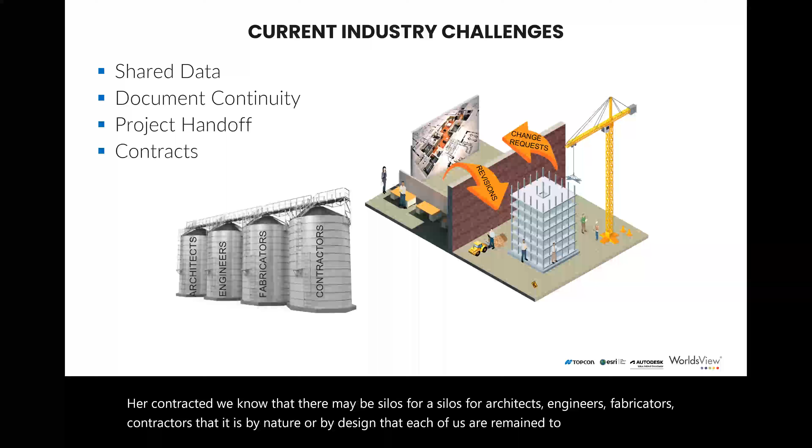In terms of industry challenges, I believe one of the key challenges we face as construction professionals is what we call working in silos. From the traditional approach to project delivery, or generally how most projects are contracted, there may be silos for architects, engineers, fabricators, contractors, that by nature or by design each of us are meant to work separately. But that in itself brings a lot of problems, especially in terms of project delivery, meaning there will be no proper coordination and collaboration, issue management, and sometimes the aspect of constructability doesn't usually come in very well, since each team works independently or separately.

And then once the design is completed, that's when you try to merge them into one at the end, by submitting construction documents that are sent to the contractor to work with.

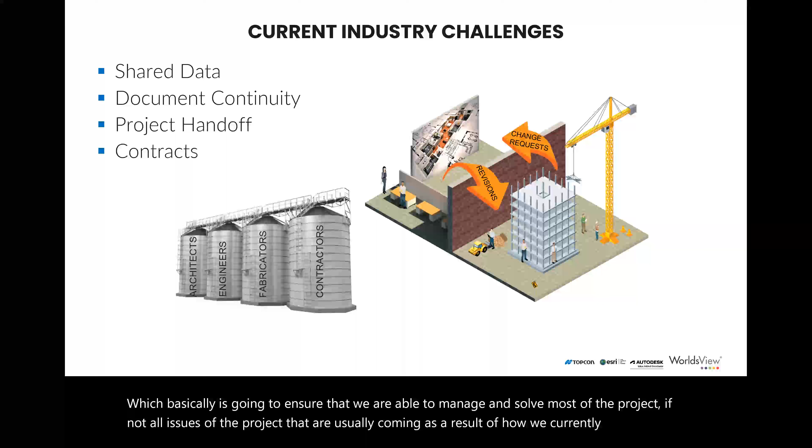So it brings us a lot of challenges, especially in terms of document continuity, project handoffs, and contract management also becomes very, very difficult. I'm not saying we need to completely move away from design and build as a method of project delivery. We can still work with that contract method, but there are better ways that can enhance collaboration and coordination, which will help us manage and solve most, if not all, of the project issues that usually come as a result of how we currently work, like managing change requests, revisions, and related aspects.

Also there's the aspect of distributed teams. Design and build teams are most of the time distributed, unless you are a multidiscipline company, and even then you still want to work with external consultants who may be located within the same country, or in different countries, or a client could be in a different location, then consultants and contractors coming in from different regions. That in itself brings a lot of issues in terms of the team being distributed.

So how can we ensure that we manage our project, especially from a communication aspect, sharing of data and information, before we even get to collaboration and coordination, which requires even better tools to help you manage the project properly.

So there are various trends that every single time I get a chance to present or talk to people, I like putting across. If you are working within the AEC space or the larger construction industry, whether an engineer, an architect, an owner or operator, or a contractor, it is high time you must be very familiar with these new trends taking up the industry. Most important is building information modeling, which is where my presentation will be centered. There's also digital collaboration, artificial intelligence - very important, strongly coming out especially within the last year - cloud computing, digital twin, smart cities, BIM and GIS integration, very important, and sustainability.

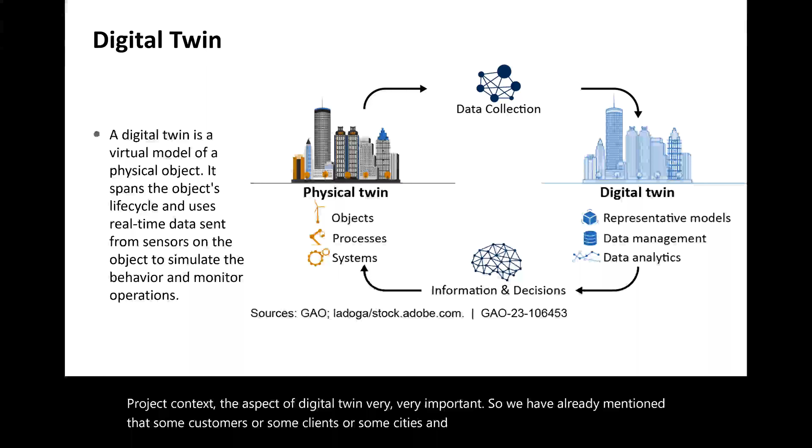The aspect of digital twin is also very important. I've already mentioned that some clients, cities, and municipalities are already looking at the consultant construction team to include a digital model as part of their deliverables. People no longer look at normal deliverables like 2D PDFs, but they want you to provide digital copies of the as-built, which can later be used for operation and maintenance.

Then cloud computing, very important. You probably are using it without even knowing it, for example if you're sharing information over the internet, communicating via emails and all that. But in this case, you're looking at using it for storage, retrieving, sharing, analyzing, simulating, and other related aspects of project delivery beyond the conventional way of just cloud as a software service. You can also use it as a platform and also as an infrastructure.

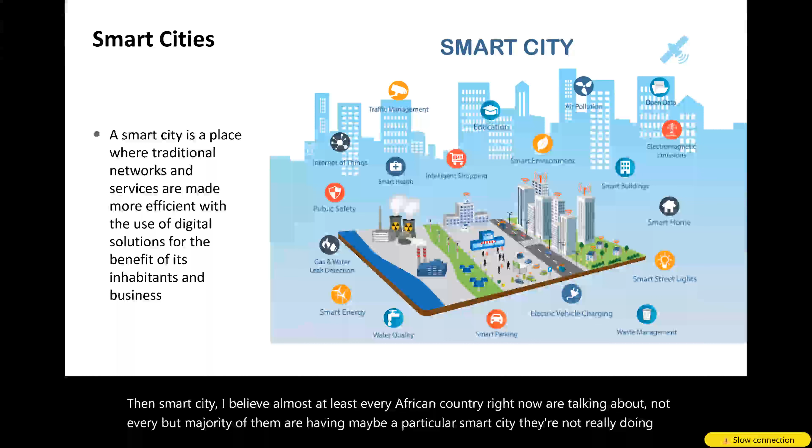Then smart city - I believe almost every African country right now is talking about, or majority of them are, developing a particular smart city. They're not really doing it the way it's intended, but some are already developing a smart city or something related, maybe calling it technopolis or technocities with various terminologies being used. This is where you, as a consultant or designer, need to be ahead of the game, to understand how best these kinds of cities can be delivered, and exactly what's needed to be incorporated, especially from a design point of view.

And lastly is the use of drones, which is very important, especially if you're in infrastructure design - how you're able to incorporate it for efficiency, especially in data collection, reusability of the data, and even data informing the future of operation and maintenance. This is very critical from that aspect.

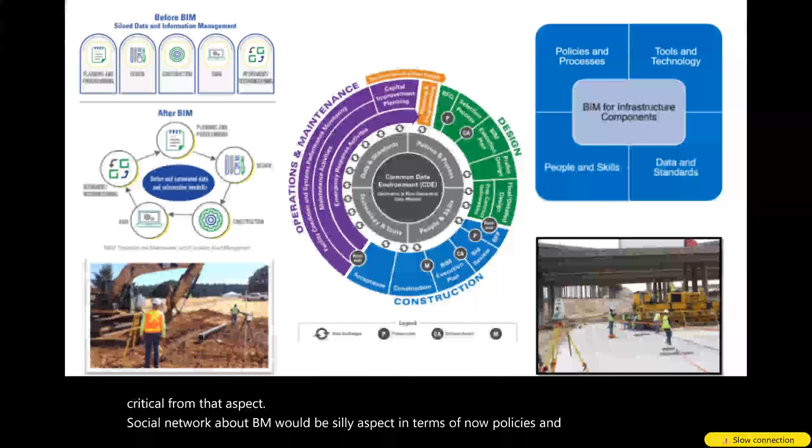Especially talking about BIM, there would be several aspects in terms of policies and processes, tools and technology, data standards, and even people and skills. It's very important from a BIM point of view, because for BIM we basically look at integrating the entire project life cycle - the same information we start off with from project inception ideally should influence the decisions made even on how to operate a particular built asset. So there's the aspect of technology and tools, the aspect of people and skills, and the policies and processes - like, how are we going to execute the project?

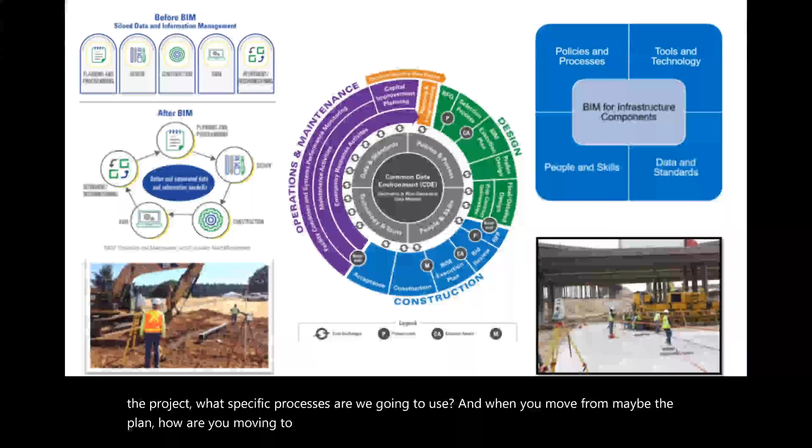What specific processes are we going to use? And when moving from the plan, how do we move to preliminary and detailed design? How will we do the exact handover? For people and skills, we look at the request for proposals, the bids and review, BIM execution planning, construction, and even acceptance of the project.

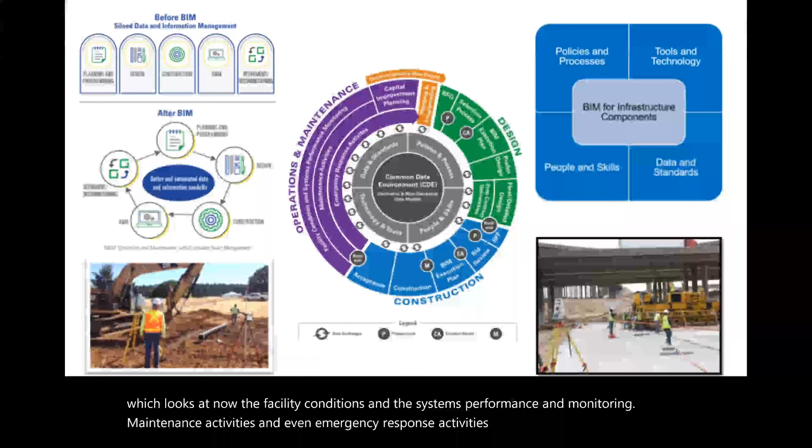Then there's the aspect of operations and maintenance, which looks at the facility conditions, system performance and monitoring, maintenance activities, and emergency response activities and mitigations for the project. So with BIM, we look at the overall project life cycle and how to integrate and ensure that every specific phase relates with the other, and are able to efficiently manage and deliver the project in its entire life cycle.

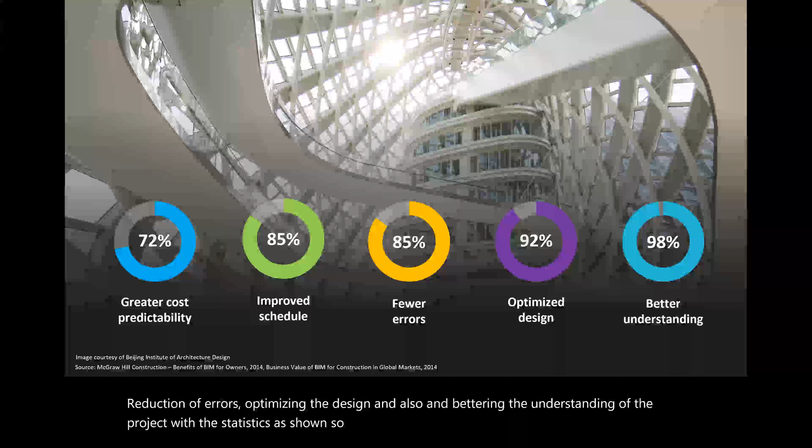Several people who have used BIM have reported quite a number of benefits, especially in terms of costs, improving schedule, reduction of errors, optimizing the design, and bettering the understanding of the project, as shown by statistics. This study was done by McGraw Hill Construction in 2014. I'm sure some of these statistics have increased since then, but I want to point out that as much as a decade ago, people were already using these technologies and processes to deliver their projects, while we are still very far behind.

And therefore, that's why there's need for us to change and see if we can catch up with the rest of the world.

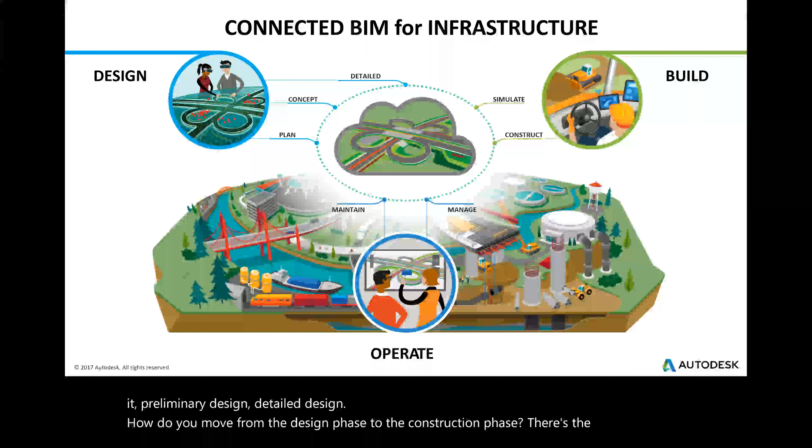So for example, from an infrastructure point of view, we're basically looking at the overall project life cycle in terms of how we do our planning, conceptualizing it, preliminary design, detailed design. How do we move from the design phase to the construction phase? There's the aspect of constructability checks, coordination, and simulation. Then after that is when you do the actual construction. And once we've constructed it, how do we hand over the digital copies or as-built models that will help the owner operate and maintain the built asset?

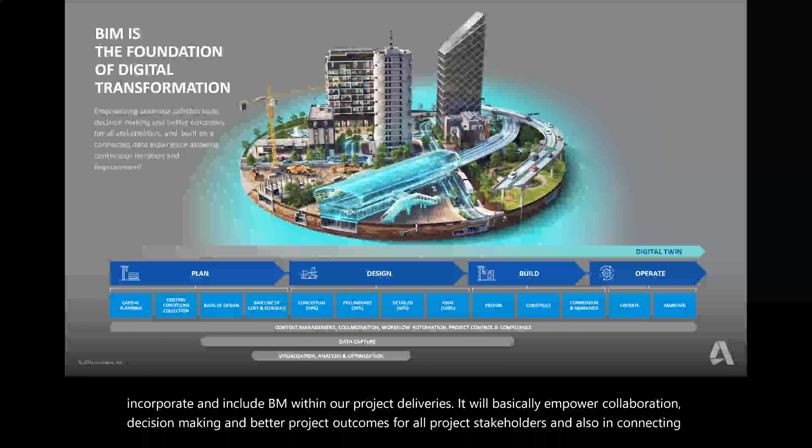So basically, BIM is the foundation of digital transformation. For us within the construction industry, to say that we are transforming just like other sectors of the economy, we need to find how best to incorporate and include BIM within our project deliveries. It empowers collaboration, decision-making, and better project outcomes for all stakeholders, connecting data that allows for continuous iteration and improvement. It applies to every specific phase of the project, with the main aim being to integrate and ensure the entire project life cycle is connected.

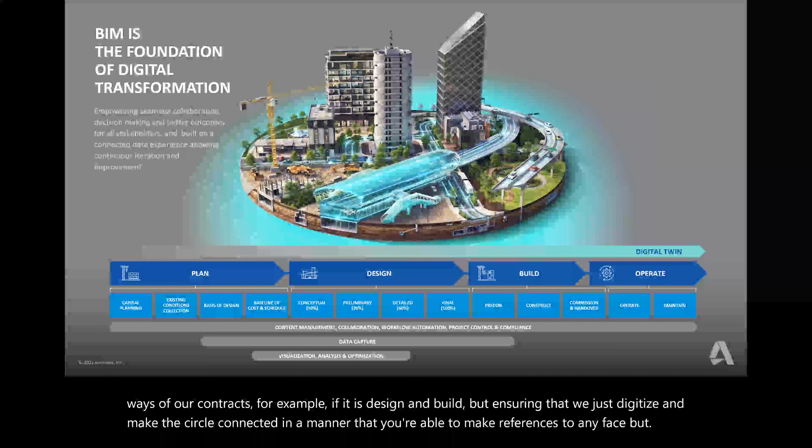That doesn't mean you have to change the contractual methods. We can still maintain conventional contracts, for example design and build, but ensure that we digitize and connect the circle so that you can make references to any phase. Those who have implemented this find it works very well, especially with design build, as opposed to design bid and build.

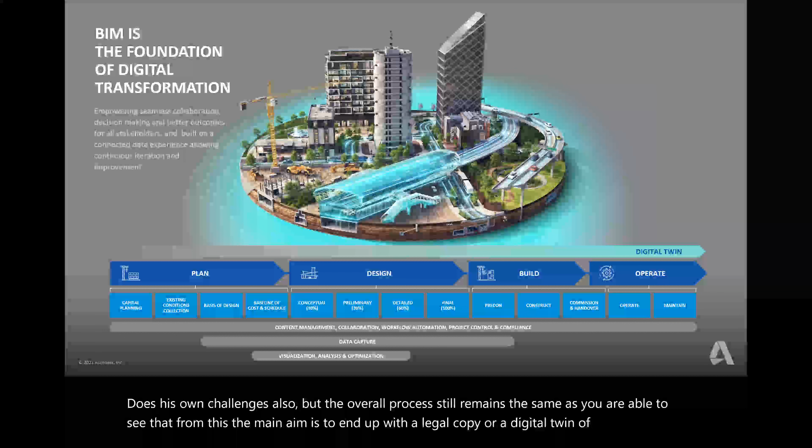Design bid and build is the conventional approach that most projects follow—actually more than 90% of projects follow design bid build. But if you move slowly and incorporate design build, it has its own challenges, though the overall process remains the same, as you can see. The main aim is to end up with a digital copy or digital twin of the built asset that can be used for operation and maintenance.

As Martha mentioned at the beginning, Autodesk, being the technology leader within the construction industry, produces applications and tools that champion and develop the advancement of BIM and this digital transformation we are talking about. Some of these tools we are very much familiar with, like AutoCAD—you might have used AutoCAD without knowing that the developer is Autodesk.

So what I will do in this case is show a workflow or seamless process that you can use to implement projects, ensuring that we take it to the next level when it comes to project delivery.

Not only does Autodesk produce their own products, but they also develop applications that allow integration with third-party applications. For example, when running a project there's a need to have an ERP system by the side, which might not necessarily be Autodesk—maybe SAP or other related ERPs that help manage other aspects of the project, like HR. You can integrate with the Autodesk application so the project is managed wholesomely, as opposed to having different systems that don't communicate with each other.

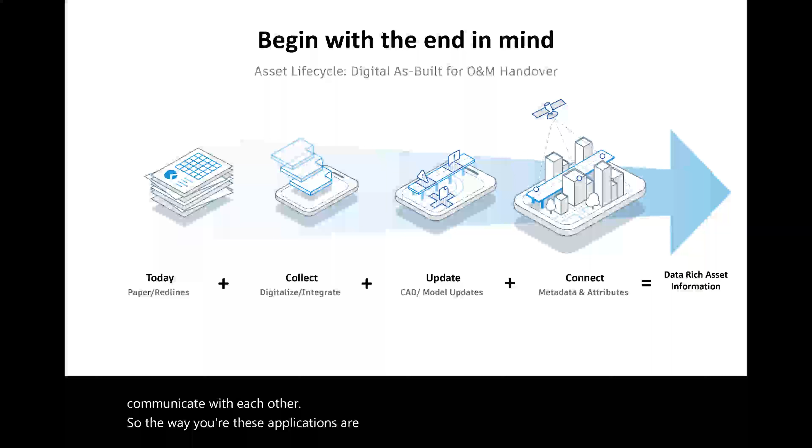The way Autodesk applications work with projects is similar to someone born today—you start crawling, walking, running, and eventually being decommissioned. It's the same way this Autodesk application works: if I'm starting a project today, I need to collect data, update it, design, connect, and then distribute.

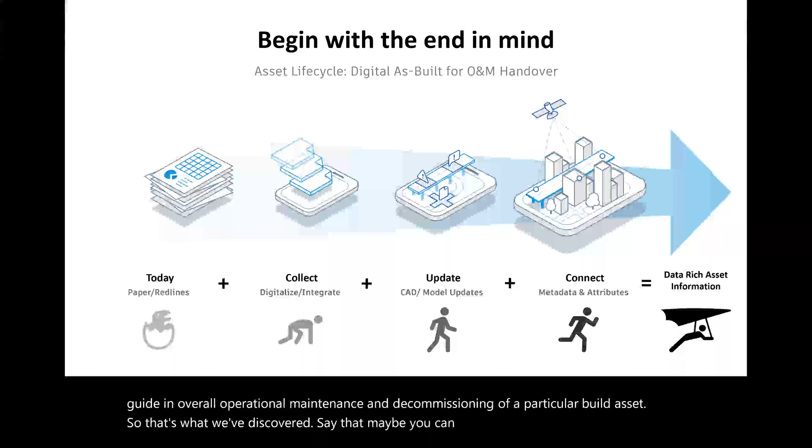It keeps developing one by one until you have a full project. Basically, Autodesk has applications for almost every phase of the project, and some of them overlap. I might start the project to do a concept or feasibility study, but as I keep developing and adding more data, the same application is used while communicating with others within a particular package, enabling a data-rich set of information that can guide overall operational maintenance and even decommissioning of the built asset. So that's the aspect of crawling, walking, running, and even flying with the information you've gathered.

At this level, I can give a quick overview of how we would use this application in a workflow process that can enhance or elevate project delivery, especially from an infrastructure or vertical building point of view. The main aim is to look at how we connect the data—that's the most important thing—while focusing on the overall project timeline, project milestones, and looking forward to better project delivery using Autodesk solutions. The two product solutions I'll be using are the AEC Collection and the Autodesk Construction Cloud.

As we go along, I'll be able to explain what each of them are and what specific solutions are in it that will enable us to deliver this project. The Autodesk Construction Cloud is basically a cloud-based solution for project management, incorporating communication, coordination, and collaboration.

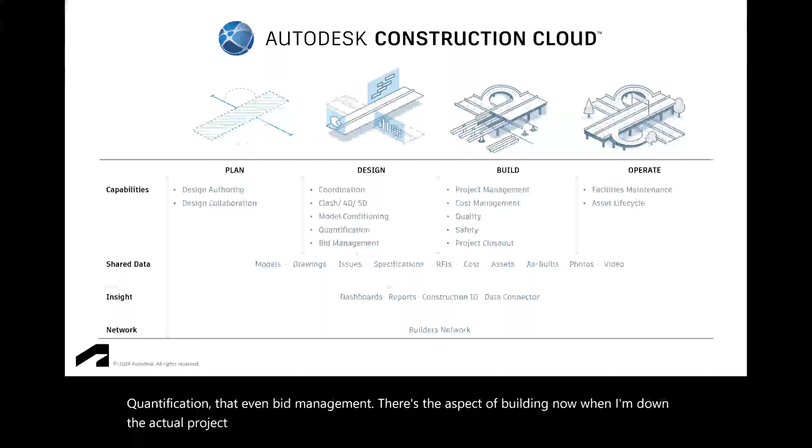If I want to develop a plan, how do I manage project aspects when planning, like design authoring and design collaboration? In the actual design phase, how will I manage coordination and clash detection while incorporating both 4D and 5D quantification, and even bid management? Then there's the building aspect, when I'm down to actual project execution - project management, cost management, quality, safety, and project closeout. And lastly, even the operation phase.

And while doing this, we know there's the aspect of RFIs, costs, specifications, drawings, photos, and videos that you use to manage the project.

As I said, these applications even have the aspects of AI. The Autodesk Construction Cloud has what we call Construction IQ, which is an example of an AI-enabled application that's able to help you predict and know exactly how your project is likely to perform. We all know that AI basically uses information, history, and data.

So based on the history of your project, Construction IQ in the Autodesk Construction Cloud is able to tell you, as the project manager or project admin, that based on how you've been performing the last 3 months, this is how it's expecting you to perform, if you don't put in place any necessary measures different from what you already had in the last 3 months.

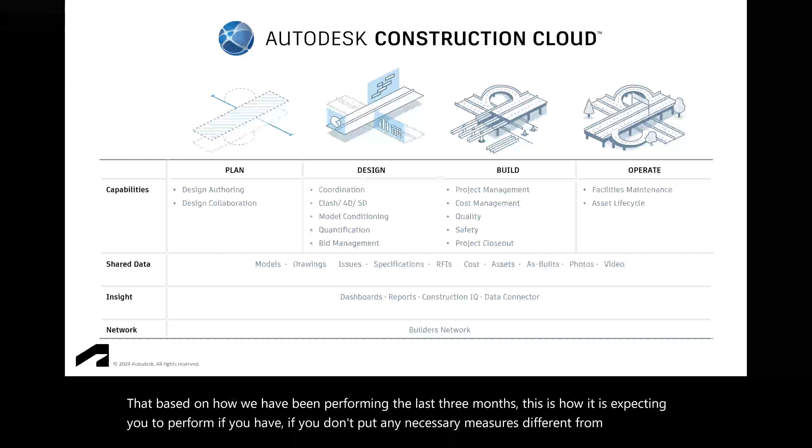So maybe if it's telling me that based on how we had performed the last 3 months, my project is likely to take this long, that basically helps the project manager know exactly what to put in place to bring their project back on track. Just as an example.

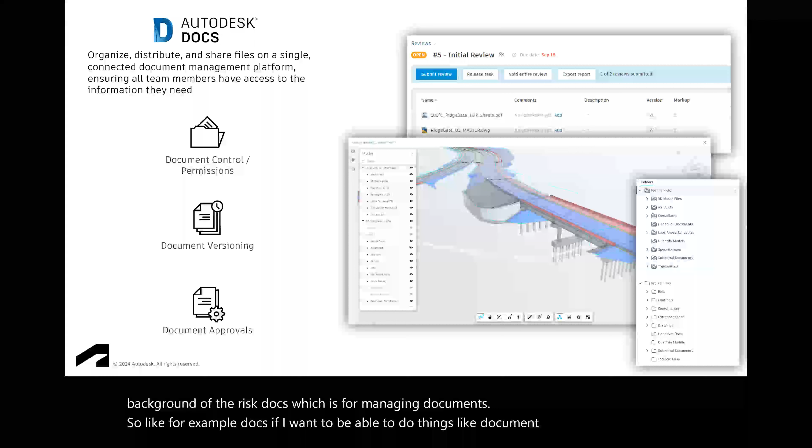The Construction Cloud has several modules, like BIM Collaborate, Takeoff, Build, and many others. But the key applications run on the background of Autodesk Docs, which is for managing documents - document control, permissioning, approval workflows, design reviews, and overall communication within the project management part. We incorporate and integrate them within one single platform that ensures all team members have access to the information they need anytime, anywhere within the project.

So I'll take a basic project life cycle that we know, where mostly we need to do planning, designing, building, and operating. Ideally, I need to understand what happens within the planning phase, the design phase, what we'll do at the building phase, and even the operation phase.

So as I say, you are trying to elevate how we do the project. What I'll do is take a simple road project and take it through each of those project milestones within a particular period of time, and then we'll see how we are able to deliver it.

So I can subdivide our project milestones further. Within the planning phase, what happens for a typical infrastructure project would be the purpose and need analysis - I need to understand why do we need this road, and for what purpose. Then after that, I need to understand also what are the various alternatives that I can consider for this particular project.

That's the planning phase. Once I'm done with the planning phase, I go to the design phase. So it basically means we have provided justification for why we need to do a particular project. Justification could be economic, technical, social, and many other aspects you need to consider at the feasibility study.

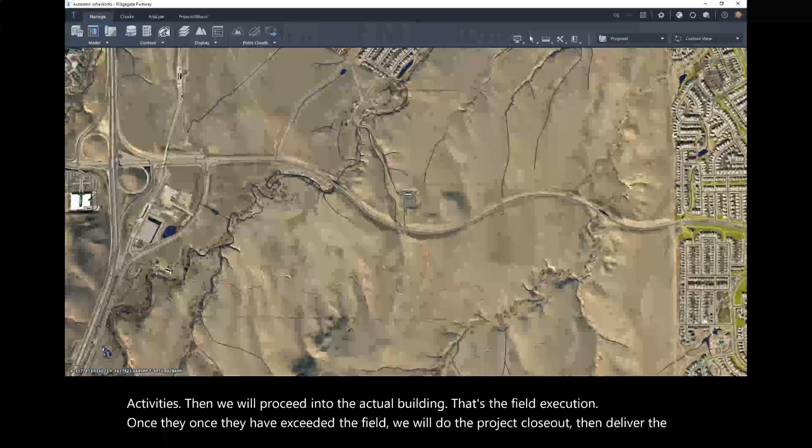So in terms of our purpose and need studies, we have a solution within the AEC collection called InfraWorks. Very good application for feasibility studies, concept, and preliminary design. In this case, we are using it to perform traffic analysis and simulation, to help us understand that there is a need of improving the road.

Heavy traffic exists. Okay, apologies, there would be some background noise. I think someone has just tried to maintain the office in the next building. So I'll apologize if you guys are hearing any noise wherever I am. It's beyond my control, so I'll just retake that and explain it once again.

So we'll say that in this case, we are doing purpose and need analysis. One of the primary purposes of doing a road is to help alleviate traffic congestion. With the use of Autodesk InfraWorks, you're able to gather traffic data, analyze, and simulate. It's able to tell you the current delays, the current time it takes individuals to move from point A to point B. Once you have seen that there is heavy traffic congestion, we are able to use that to justify that we need to either do the road or increase the number of lanes to accommodate the many vehicles, or introduce an alternative route or bypass so that people who are just going through should use the bypass while local traffic should maintain their existing routes.

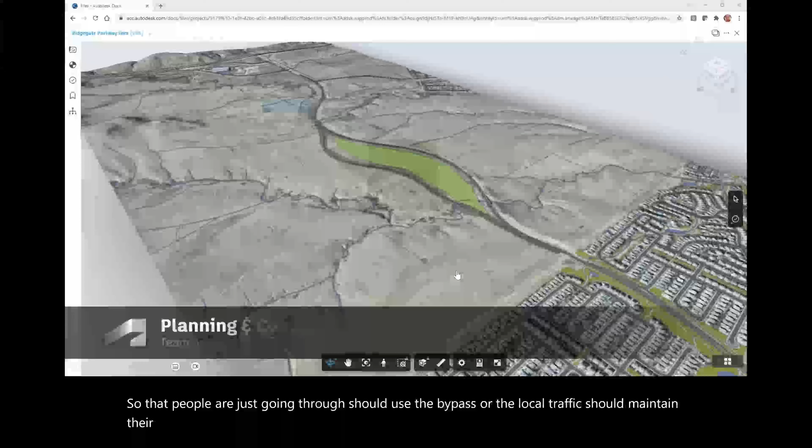Then there's the aspect of using Autodesk Docs to share and communicate this information - I could be the client seated at location A who needs to review and give comments to what the engineers sitting at location B have done. How this information is communicated is very important. Traditionally, there would be a call for a design review meeting or presentations and several back and forth communications. But the way this is going to help you manage this is that you are able to remotely share and communicate on the project.

At my desktop, wherever I am, I'm able to publish and share the design that I'm proposing. And you as the client or owner, wherever you are seated, or the project manager who needs to review this, will be able to remotely get access to the information and give me real-time feedback on what you think - whether the current alternatives I'm evaluating are okay, or if you have a suggestion on how best you'd want it done, as opposed to what I'm proposing. So by the time we are calling for a meeting, we have already discussed a lot, so it's just coming to confirm one or two things that might not have come out correctly when we do it remotely.

So once we've done purpose analysis and need assessment, and settled on a particular alternative, we would proceed to start gathering data. Again, the most important part is how this data is going to be gathered, shared, and integrated within the project, because data gathering and data collection is where most time is wasted, and also where most resources go.

Several surveying is done, several acquisitions of data are done, but the way we are currently using that information in the project is in silos - the surveyor doesn't care as long as they have collected the data. How they are going to publish and share that information, and whether it's going to be used in the right way, doesn't usually come out correctly. So there's a process where you can still maintain the conventional process - the use of conventional surveying methods like GPS and total stations.

That is still acceptable. But most important is the building of it, like the aspect of having the georeferenced model, and having imagery that communicates a lot more information than just the point data collected, so that I'm able to see my project location in real time, in the context of where the data was collected. Traditionally what you'll see is just the points without having that imagery in the background to help us know exactly the route, the existing buildings, existing road, and existing land use within the project location.

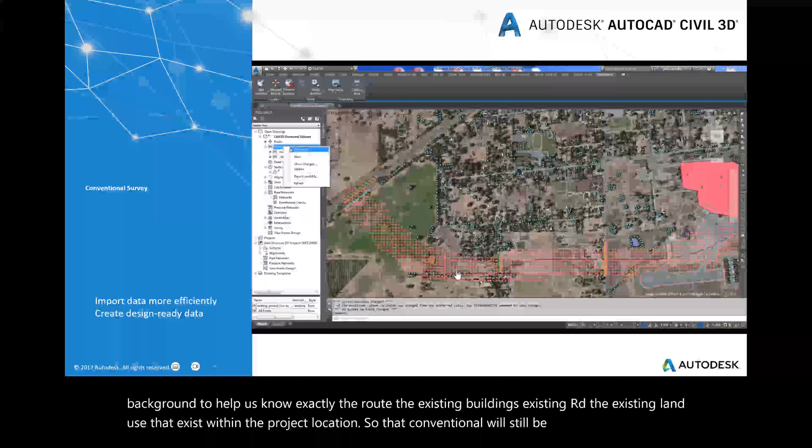So conventional surveying will still be accepted, and this has traditionally been one of the strong areas of Autodesk Civil 3D over the years. But if you want to go further, there's the aspect of linking it up with various imageries, either from satellite or from various GIS sources, so that it's able to make it more contextual to what you're doing. Beyond that, there is the aspect of what we now call reality capture.

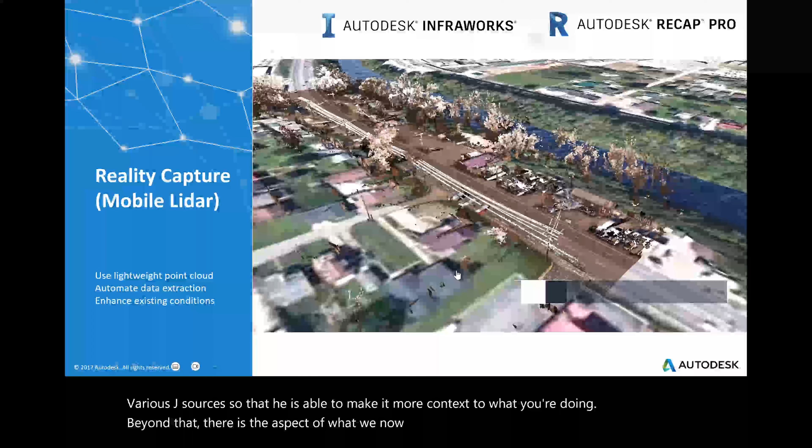This is a bit more advanced. This is why I'd propose using drones or LiDAR and laser scanners. This enhances accuracy, and is actually recommended if you have to go to this level of design. There's enhanced accuracy, reusability of data, and better understanding of the project, because you can see everything in 3D, so that even if you're not technical, you're able to easily relate and make better understanding of what's being done, compared to what you saw in the previous slide, which was a bit more technical.

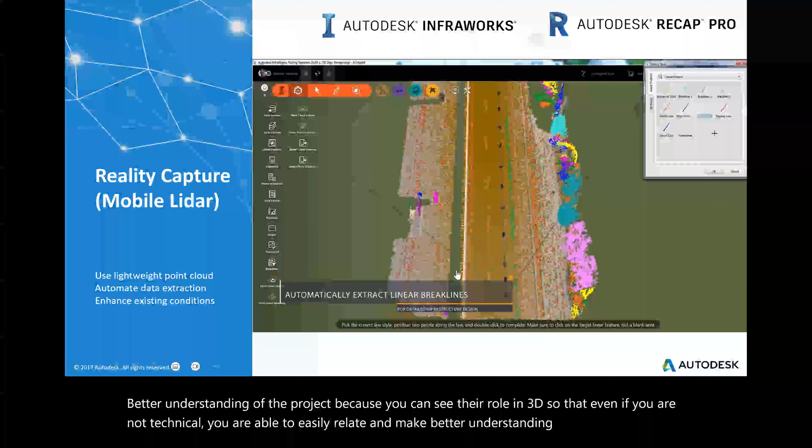Okay, so again, I'm still apologizing - our next door office has decided to do some renovation and we didn't get a memo. So if you hear a lot of noise in the background, kindly bear with me.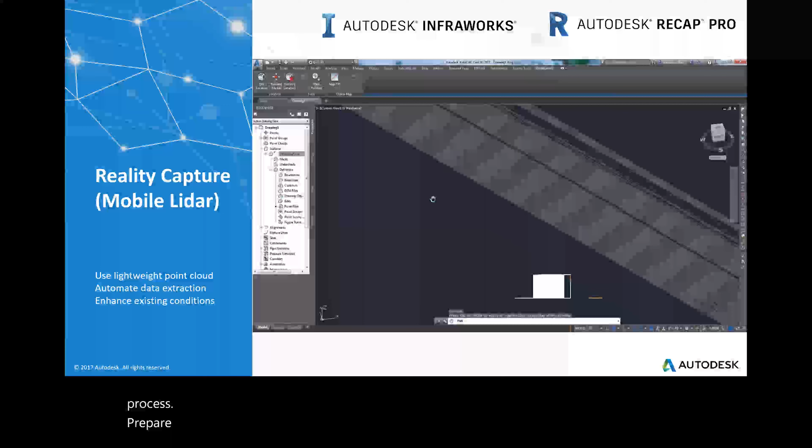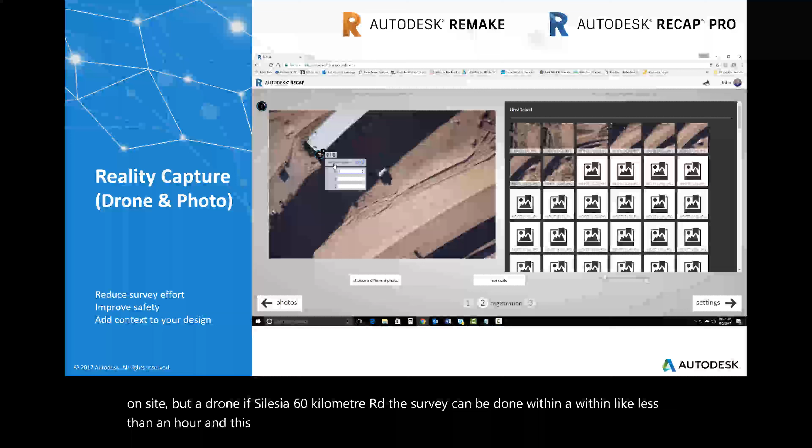So if you are to use a drone, it's very simple, and I think this is the method I ideally prefer most, as it easily gets the job done. With conventional surveying, the surveyor will take several hours, weeks, or months on site. But with a drone, if it's say a 60-kilometer road, the survey can be done in less than an hour. This gives you real-time data that you can still prepare using almost the conventional process you're used to, like defining ground control points or benchmarks and linking those with the model.

And Recap makes it so much easier that you, as the engineer or surveyor, just choose exactly what process you want to follow and what the exact data output will be. So this gives you context, real context site information that can be reused anytime, anywhere within the project delivery phase.

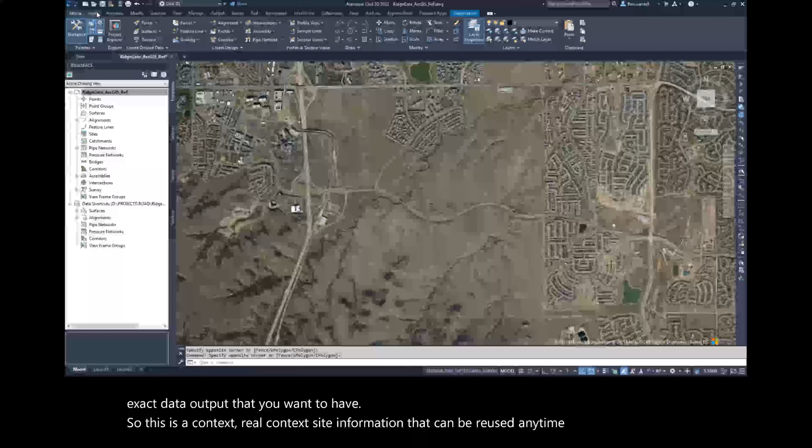Then there's also the aspect of gathering GIS data, which is very critical, and one aspect that most of our projects fail in - especially in establishing existing conditions like underground utilities, overhead cables, and existing land use. This information you can easily get from GIS data, and the best source would be the local authorities or municipalities who operate and own things like stormwater, sewer, and water distribution networks, and other related aspects of the project.

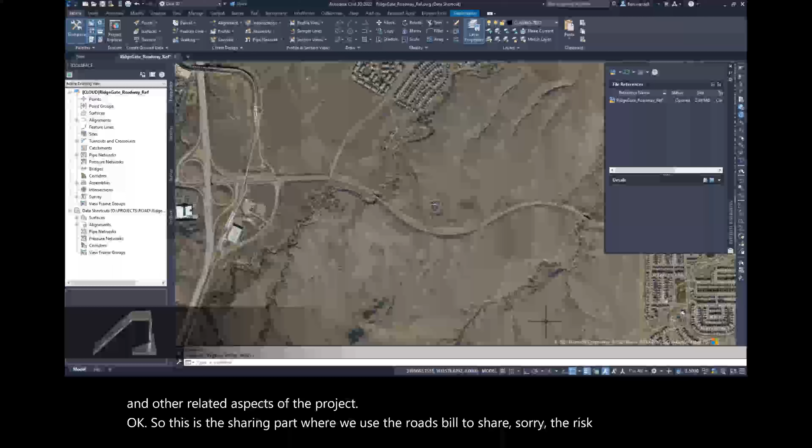This is the sharing part where we use Autodesk Build, Autodesk BIM Collaborate Pro, and Autodesk Docs to share. It basically allows you to define work sets and packages, and who you'd want to consume and use them. After that, you can keep track of the various aspects of that information and how it flows from one point to the next - there's accountability, because I'll know when a particular work set was consumed, when it was used, and whether it was reshared to another person within the project. So in terms of developing the topography and overall design, everything is managed within one interface, so the engineer just needs to log into the platform to reference the surveyor's work while doing the actual design.

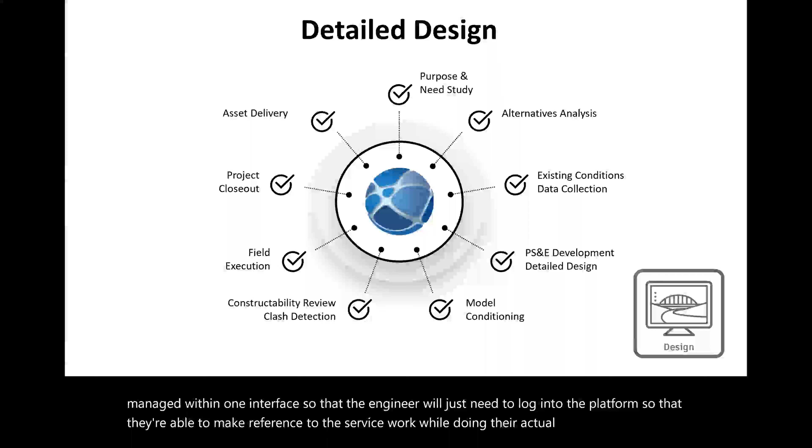So once the data is gathered, the next step is to proceed to the design. We have done purpose and need assessment for the project, established alternatives and picked one, done surveying, and acquired GIS data to show us what exists below the ground where the project is. Now we are ready to start doing the design.

So for the design, we are not going to start anywhere, because traditionally, at this phase we still need to gather more data, but the kind of data gathered and how it was stored enables us to retrieve it for ease of reference when doing the design. So my work as the designer now is just to lay out my geometry on plan and on profile, the cross sections, and quickly start running quantitative analysis to define the cost of the project, like the sectional views of the design.

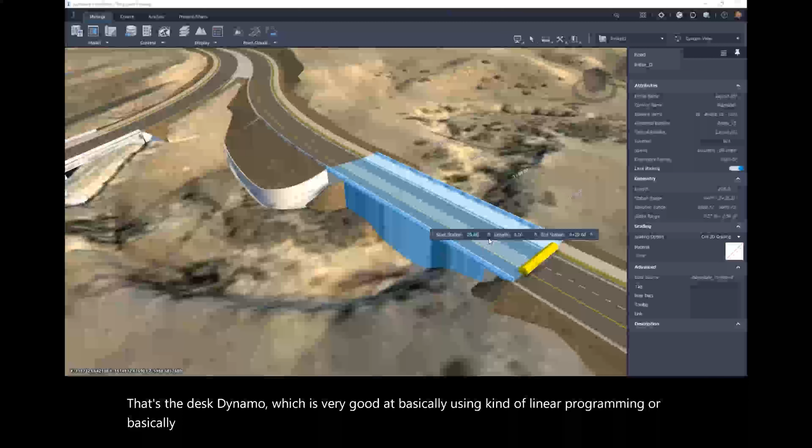This is basically where Civil 3D comes out to be very strong when it comes to the geometric design of the road. But you can take it further using computational design through Autodesk Dynamo, which is very good at using visual programming, or computational design. If there are aspects like bridges, all of them will be incorporated into one.

Like structural bridge design, whether it is steel girder or concrete deck girders, you are able to quickly choose and develop the geometrical details of the bridge and run analysis, because Autodesk InfraWorks itself has the aspect of structural bridge design that links up with Autodesk Structural Bridge Design to help designers come up with accurate and precise structural details that follow specific code-based design standards.

Then how this is shared is very critical. So for the bridge, you can store, reference, and utilize the sheets from which the details of the bridge have been prepared. That will enable overall communication, coordination, and collaboration, which is a surely very critical aspect of project delivery for structures as well as the geometry you are working on.

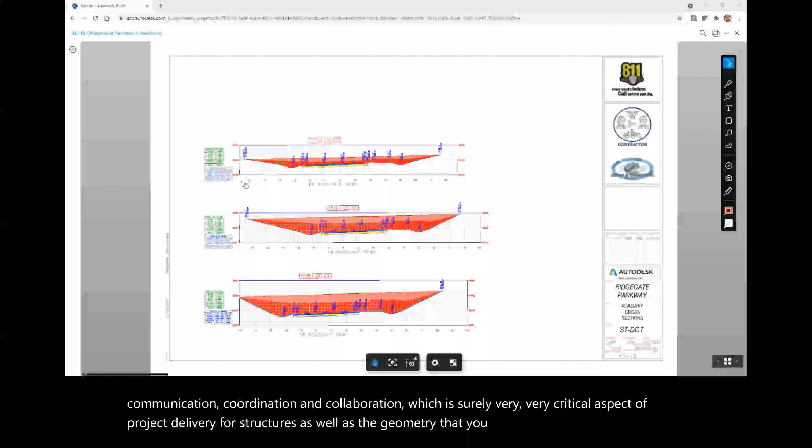So we are now done with the design. The next part is to look at what we call model conditioning, and then we'll quickly run constructability checks, things like clash detection and overall coordination. Then after that we'll deliver our project. But the aspect of pre-construction will also involve quantities, preparing schedules, and maybe programs of work that we will issue for the contractor to follow to deliver the project.

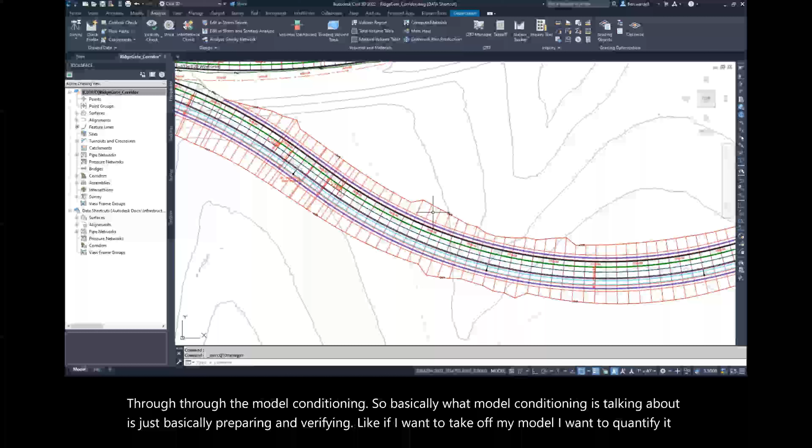Okay, so that's what I'll drive at quickly through model conditioning. Basically, model conditioning is about preparing and verifying. If I want to take off my model, I want to quantify it: what are the unit rates, what are the various quantitative measurements I'm going to take, is it for the earthworks, the bases, the sub-base, the subgrade, and exactly what are the precise quantities I'm looking at?

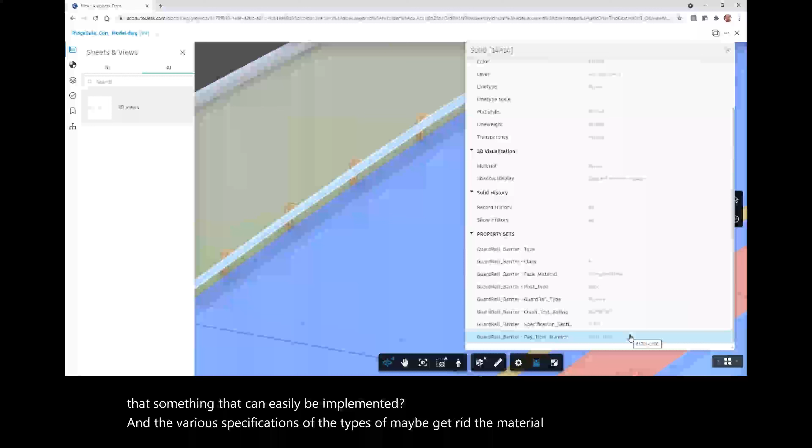Are they in line with what we had done based on what exists on the actual ground? So this enables me to check and verify that whatever I'm designing and quantifying conforms to various material investigations and geotechnical investigations done on site. So if I'm saying I'll have this much earthwork, does it convey the same thing we want to see on site? If I'm saying I'll have this kind of guardrails, is that something that can easily be implemented, and what are the various specifications, material requirements, and quantitative measures we must have with respect to that.

So Autodesk Docs is still being used to manage and track all those kinds of activities, so that once I've input them in the model, whoever is receiving and reviewing my work just has to drop down and check what material specifications the engineer had given, and whether they are in line with what you are expecting from the scope of work the engineer was assigned with respect to this project.

Once you've done the model conditioning and everything is confirmed, the next thing before you move to site to construct is to run constructability checks and clash detection. This is actually a very critical part. Traditionally, we call this design review, and it's actually a phase on its own, but doing it is not really easy, especially if you're working from 2D. So this application is Autodesk BIM Collaborate Pro.

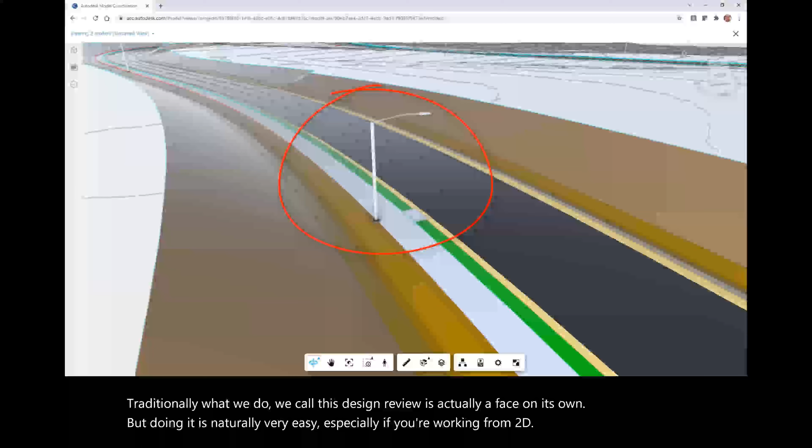It has the aspect of clash detection. So first, you need to aggregate all the design models. Like you see in this case, I'm having drainage, traffic, electrical, structure, pavement.

So I'm just quickly running each of them, and it will be able to clash detect whether there's an aspect that is likely to clash with each other, such that if the contractor was to implement it as is, will he be having issues in delivering the various aspects of it? So it will tell us the possible areas of clashes, so that what I will do as the project manager or project director at this stage is to ensure that each team member coordinates and agrees on constructability.

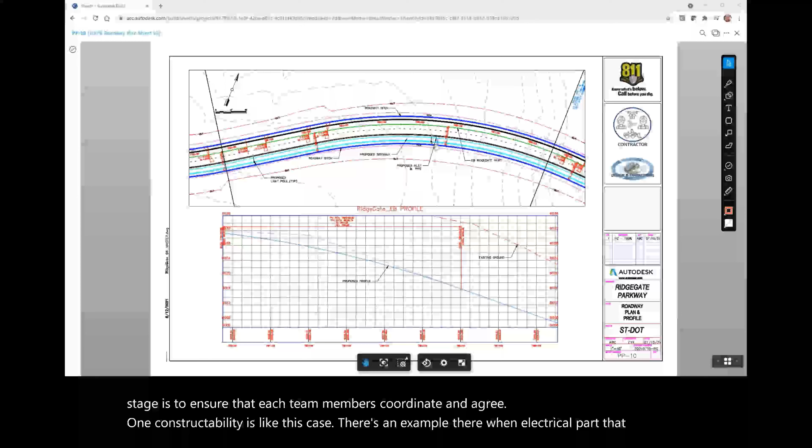So in this case, there's an example of an electrical part, a street light, clashing with a drainage structure. So the agreement is between drainage and the electrical guy. The electrical guy has agreed to reposition his element.

And once all the issues are resolved, we can quickly go through Navisworks to help us construct it virtually. And as it's constructed virtually, it comes out with a construction sequence or program of work that usually we do in MS Project or in MS Excel.

So this is a little bit more automated. From the models, I just need to specify what is the project start date, what's the project end date, what are the various resources that you're having, and how much piece of work can we do a day. And therefore, based on that, from the models, how best can we construct and sequence it to ensure efficiency in the timeline for the project.

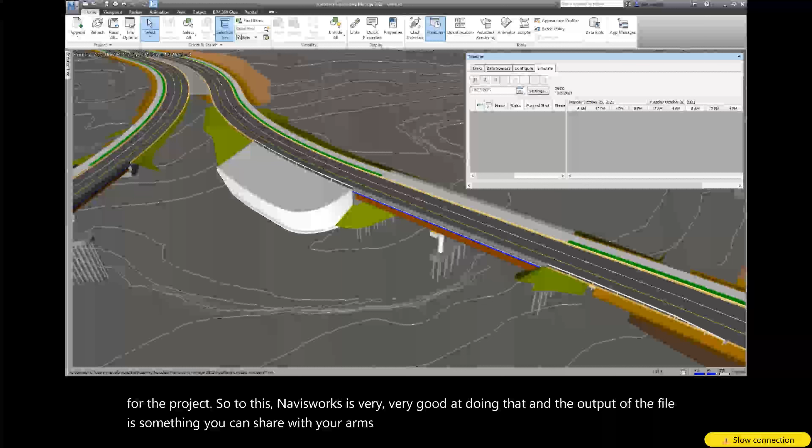So Autodesk Navisworks is very, very good at doing that. And the output file is something you can share with your MS Project, basically for further verification and check. Especially if you already have an existing template from MS Project, you're able to even import it and get started from it as a background for your project schedule.

So now that we have quantified, we have scheduled, and basically we have also costed, you are able now to start doing your field execution, the actual project delivery. So what we'll show at this stage for project delivery is largely with respect to managing activities, like managing requests for information, managing issues, schedule, progress tracking, meeting minutes, submittals, forms. So basically the specific activities that you work with on site to manage a project.

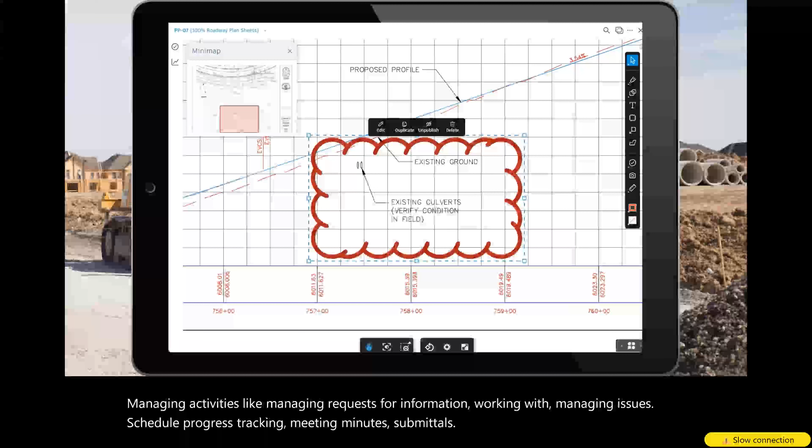In this case, I'm just highlighting an example where the contractor on site finds that there's an existing culvert that the design did not capture. So it raises an RFI to the client and the consultant to give direction on whether they should demolish that existing culvert, or whether they need to verify or do a condition survey and check if it can be reused within the new project. So how they are communicating is very, very important.

Traditionally, this would have required several back and forth with several site visits. But in this case, the contractor being on ground just takes photographs and videos, uploads and shares them when creating the RFI to the designer. So what the designers need to do is just go into their design models and check. Like in this case, they're redesigning and verifying if it will impact quantities at that specific location.

Remember, that would be a variation. If not managed, it can even result in a 20% cost increase. So proper communication and proper management of that issue, and tracking it to closure, is basically where the value of this process comes in - we are trying to avoid a potential variation by managing it very early and having a precise way of managing the actual issue.

So if it's a redesign, the client is already in the picture, so they know what to expect. But the consultant and contractor can manage it to ensure that it doesn't blow out to something else that really was not planned for. So all those aspects in terms of progress tracking, you can see they are listed here - that's just the example of RFI. There's also the aspect of submittals, managing site meetings, progress tracking, schedule, asset reports, and all that can be managed. So I'll again assume we have done the construction now, so we just need to close out the project.

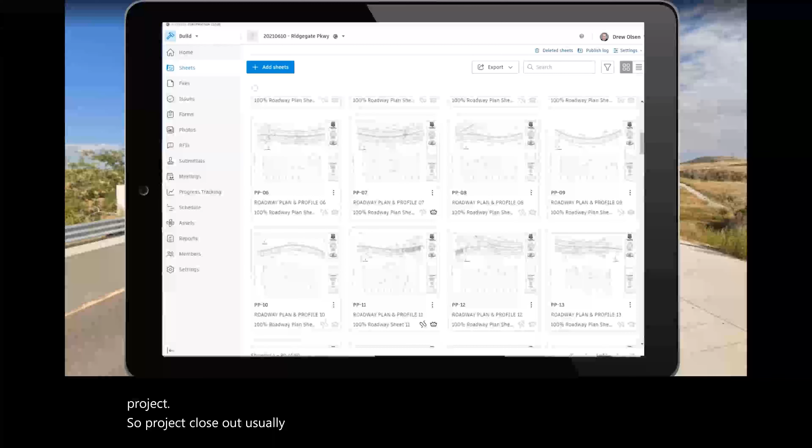So project closeout is usually basically looking at preparing as-builts. That's the most important part. So there's the aspect of as-built preparation, which is not so much difficult. Remember, we have been making changes within the models and the designs as we were proceeding, so the client and the contractor won't have to spend several hours, days, or months preparing as-builts.

You just need to confirm what was built versus what you still have in your design model. So in this case, there's a flared guardrail that initially the designer had done as straight. The contractor is just updating and saying it was initially straight, but now we did flared ones. And then it's just a matter of packaging and sharing it.

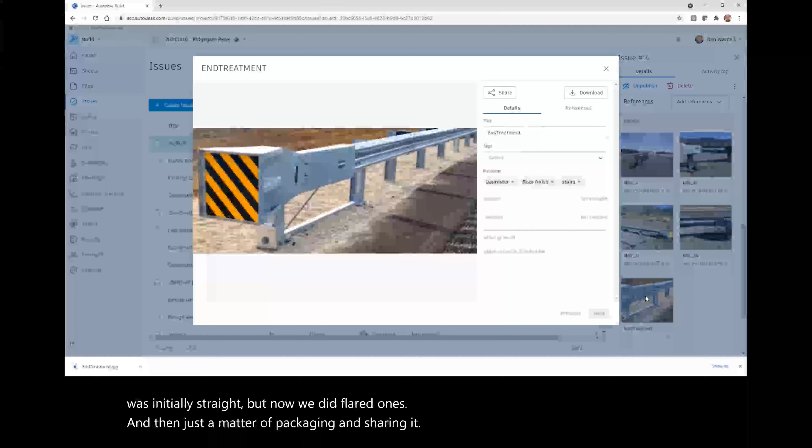Plus all the photos, all the progress details that were prepared will be shared directly. And it's not even a matter of publishing or sharing, because they're already available within the project management platform - that's Autodesk Build - that you just publish and share with the owner through the verification and approval of the consultant.

Then lastly is the asset delivery. So asset delivery is assuming the operation part. Again, I'll take a typical example of what happens during operation, like where the owner needs to maybe replace a particular bridge component.

So the first thing is they must have the models that were delivered - that's the digital assets. In this case, they were delivered through Autodesk InfraWorks. It's basically the same environment where the design was done, which will also be used for operation. But for operation, there'll be the aspect of integrating it back with GIS, if you remember when I talked about GIS, we used it to inform us on design.

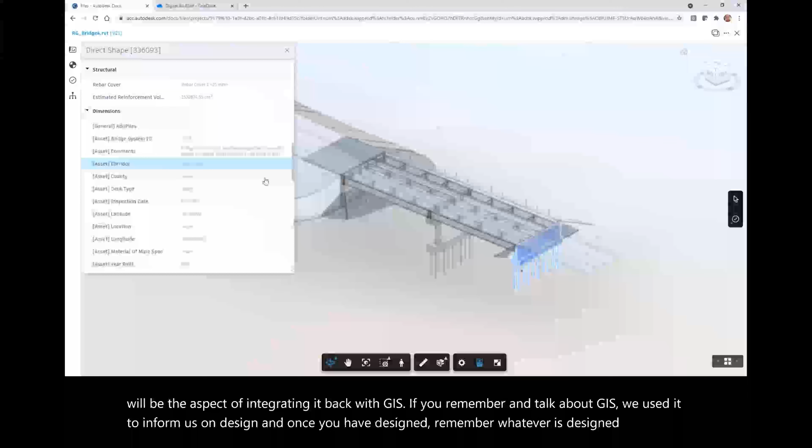And once you have designed, remember whatever is designed and constructed forms part of the environment again. So it means that we'll need to publish whatever was designed and built into GIS again. Once it has been published, it means that in terms of real-time tracking, this is where the aspect...

...of maybe using a SCADA or sensor comes in to communicate. So some sensors could be installed on bridge components, because a bridge is a very sensitive infrastructure. We can have a sensor monitoring vibration, movement, and deformation on the bridge, so that if there's excessive vibration, maybe there's been particular heavy rainfall, we need to know how it has interfered with the bridge.

...the bridge abutment, the bridge piers, the overall road component, so that if we were to plan for operation and maintenance, we'll be planning it based on real-time data on what's exactly happening on the ground, that is linked up with the built asset - the digital copy of the built asset.

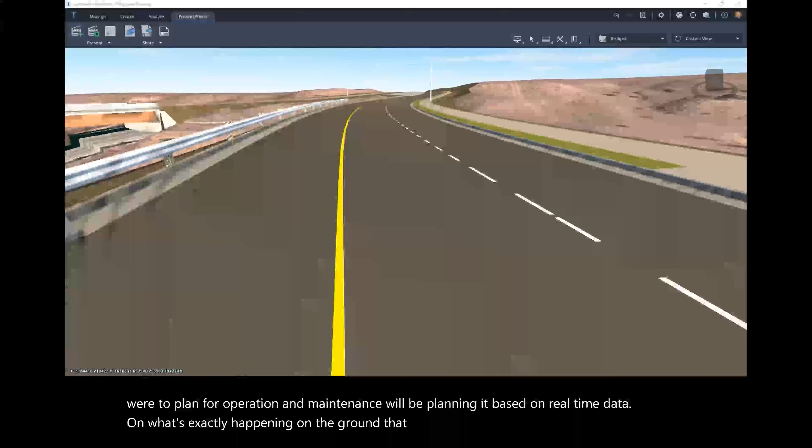So these are mentioning the bridge bearing. Information about the bearing, information about the abutment, all were contained and submitted to the client so that they are able to monitor and track. And if they need to maintain or replace a particular part, they check real-time information from the built soft copy that was shared. So that's basically how we're able to work with this BIM process for infrastructure.

There would be very many more, but of course, as we said, we can't be able to deliver all of those within one sit-down like this. But I strongly believe I was highlighting and showing how we are able to use that.

And the most important application that I've mentioned several times is Autodesk Docs. It's basically what is streamlining this in terms of communication, because what will make your project fail or succeed is just communication. That's why Autodesk Docs comes out very, very strongly in that it will help you to do transmittals, design review, connect design and construction, issue management and issue tracking, approvals, and very many more.

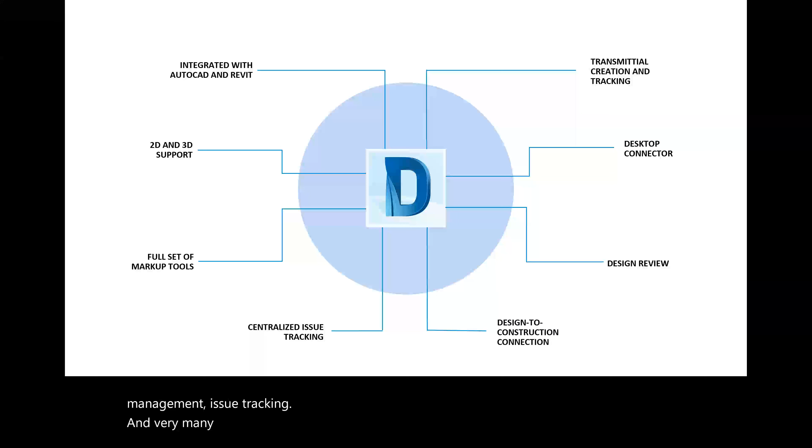So that's where most of the conversation was actually centered around, to show that communication is the biggest aspect of project delivery. Then there was also the aspect of coordination and collaboration, clash detection, and overall project management activities, as you have just seen within the process. So that basically was largely around infrastructure.

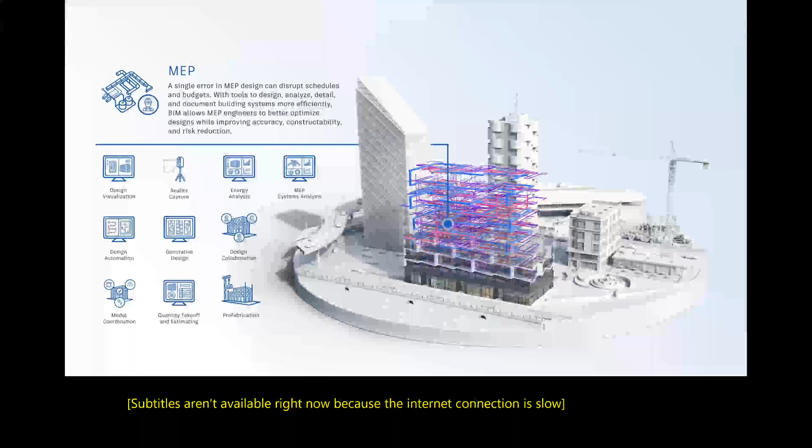So I'll take maybe the next few minutes, not more than 10, to highlight vertical buildings also - like architecture, structure, MEP, and even the construction of the same. So again, I'll take a similar approach, but I won't go into as much detail as I did with the infrastructure.

Again, with the assumption that probably we have those who are not within the civil space, but either architecture, structure, or MEP, so at least all of us who attended feel taken care of and can walk away with something from this session.

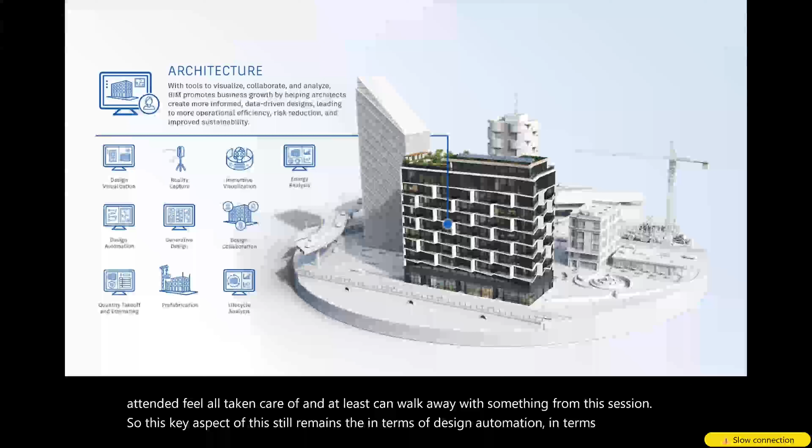The key aspect remains that in terms of design automation, predictive analytics, reality capture, generative design, overall project lifecycle analysis, quantity takeoff and estimating, all of them are still things you're able to take care of from the same package of solutions that I've been talking about from the beginning.

For infrastructure, the key application remained largely InfraWorks. But for building, it's going to be largely Revit, which I'm sure most of us are either familiar with or could possibly be hearing of for the first time.

But Revit itself doesn't work alone, just like in infrastructure InfraWorks was working with Civil 3D, with Navisworks, with Recap and the rest. So in this case, Revit will be working first with Forma.

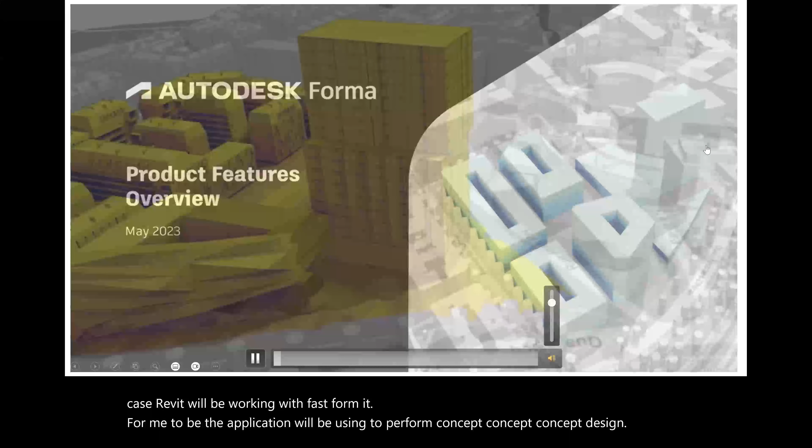Forma will be the application we'll be using to perform concept design, to understand our site, to help us perform energy analysis, and to enable us to establish the design.

If I want to do my project for a building, I need to first understand where exactly this project is going to be located, so I'll know the existing roads, existing buildings, and can properly plan how whatever I'm going to propose is likely to coexist with what already exists. Maybe it could be in an urban center or a built-up area, but there's a small open space where we need to do a building.

Creating masses is very, very easy with Autodesk Forma. So you can do parametric sketching.

These parametric sketches also define the actual building, because I'll be able to move this concept mass into a schematic design that will take into Revit, which will inform the detailed design.

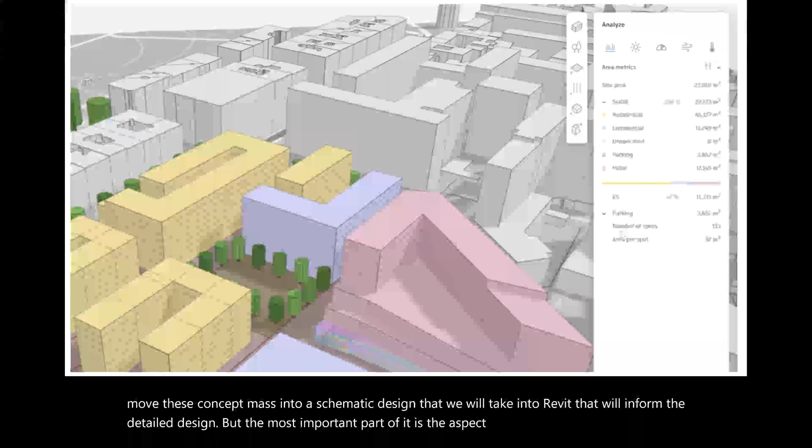But the most important part is the aspect of analysis in terms of energy studies, things like sun path analysis, solar studies, and various planning or land use activities, like whether it's going to be residential, commercial, and all those aspects of the design.

Once you finish the design in Formit, or in Forma, that's what you'll take into your Revit, or sometimes you can still go through the Autodesk Forma to perform various adjustments and analysis.

You can see in terms of site design, like the parking areas, the parking layouts, all those can also be incorporated for the proposed project that you are developing at that stage.

Once done, there's also the aspect of performing this through your mobile device. Sometimes you don't have to sit directly on your tablet or desktop. Both Forma and Formit are online applications, but there's also the option to install the desktop applications, so if I wish, I can just grab my tablet or mobile device and start the design anywhere I am.

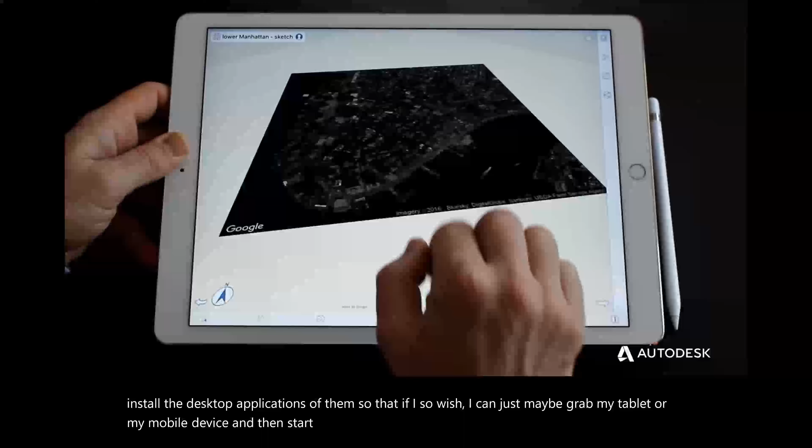As architects, as creative designers, a particular creative idea can come to you even when you're on the move. So you don't have to wait until you get to the office and sit down at your desktop or computer to start doing the design.

In this case, even if I'm on my mobile device or on my tablet, I can grab it wherever I am and start laying out the sketches, being creative the normal way they do to develop the concept.

Once that concept is developed, you just take it to Revit, from which you'll be able to advance the design further and produce the various details as may be necessary.

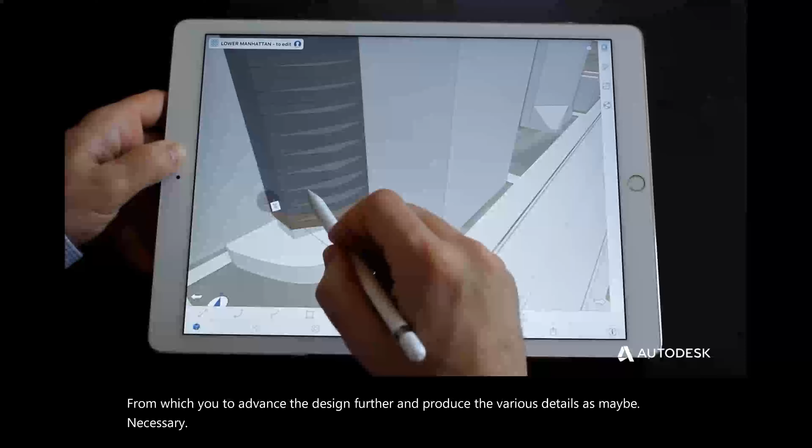So in this case, you're just playing around with it. How many floors do you want? What's going to be our facade materials? Maybe the glazing that you're going to have. You just need to choose from the list of the material library there.

Then you can even do sun path analysis, basically to see the impact of the shadows that the existing buildings there will cast on your proposed building, because that will define energy utilization. If your building is always in the shadow of the existing buildings, it means the rooms are going to be dark, and therefore you need to continuously light it during the day.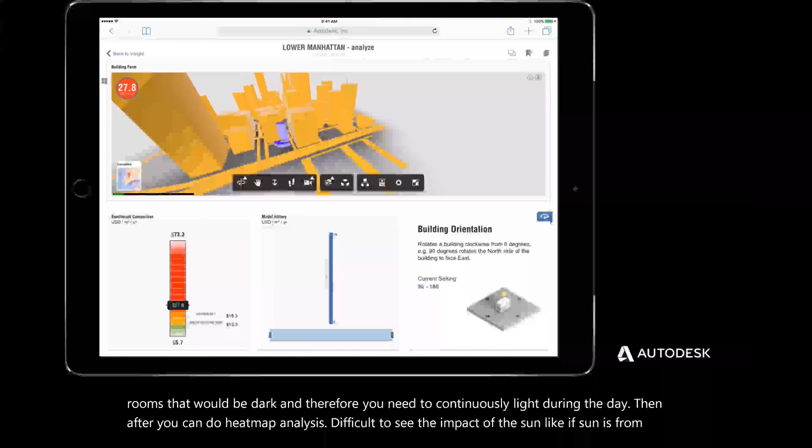Then after that, you can do heat map analysis, basically to see the impact of the sun, like if sun is from one direction. Then you can go on to perform overall simulation of it in terms of building orientation. But of course, this follows a benchmark or a design standard.

In this case, you can use ASHRAE or the AIA 2030 commitment, or the normal green building studies and design guidelines. Once completed, you send it to Revit, where you need to complete the design by producing elevations, floors, sections, and various designs as might be dictated by the project that you are doing.

Then after that, the next will be the structural bit of it, which is a very important part in terms of the structure.

That aspect will be to perform structural modeling, structural analysis, code design, library-based design, and steel connection. This will still be Revit, but now with Robot for structural analysis. So once the modeling is done, steel connection design follows. What I want to show is the modeling part.

Modeling is actually very, very easy. It won't spend much time. But the biggest part will be how do we load our structure? How do we come up with things like bending moments, shear forces? Then how do we now proceed to the design, like connection design, structural member checks, and verification?

So Revit comes with an inbuilt library. It's just a matter of the engineer checking and verifying that if I were to do this kind of connection configuration, how will it perform with respect to the loads that are applied on my structure?

Then there's the aspect of structural analytical automation, that from the physical model, how do I move it into the analytical model? That's basically the idealized structure, showing me the interaction of the member, the load transfer, and the support conditions that I might have to opt for. So this again is automated.

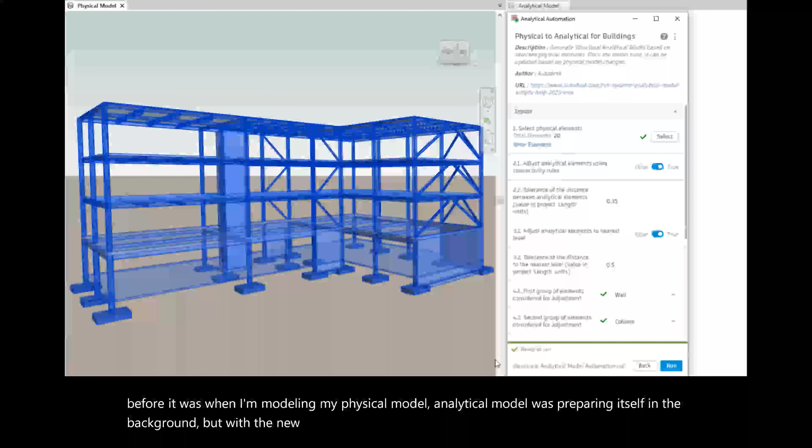If you had used Revit before, this might be a bit of a challenge, because before, when I'm modeling my physical model, the analytical model was preparing itself in the background. But with the new change since the 2023 model, once I've done the physical, I choose to automatically produce the analytical model, following various standards and computational design requirements that define the relationship between wall, column, beam, and how they are going to interact to form the supports and connections that will ensure efficient load transfer from the topmost part of the structure to the lowest part as well. So once you've done those settings, it's just a matter of clicking run.

And once I've clicked run, my analytical model will be prepared. So the analytical model is the model that will be applying the loads, the model that will be analyzing, and it is the model that will be sent to Robot for specific detailed structural analysis. Then once I've analyzed it and got my bending, shear forces, axial loads, and the rest, I will bring it back into Revit so that I can complete the design.

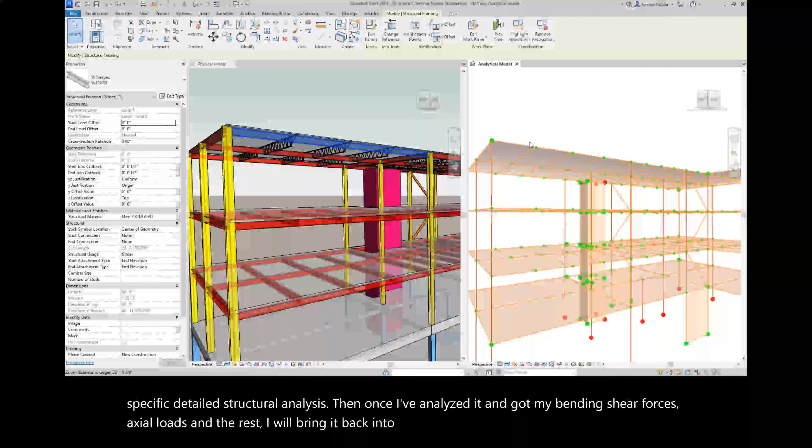So again, the workflow is very, very seamless, but of course you need to understand how the process works so that you're able to get it correctly for correctness of the design output.

One thing I need to mention is that Robot, as an application, does not have that aspect of garbage in, garbage out. So before you move from Revit to Robot, your model must be 100% accurate, because structure is now very sensitive for a structural engineer, that any single mistake you make, your building will come down. So Robot does not accept garbage in, garbage out. You have to ensure you verify robustness, materials, properties, and all various specifications, and load takedown structure so that everything is correct before Robot is able to analyze and give you the output.

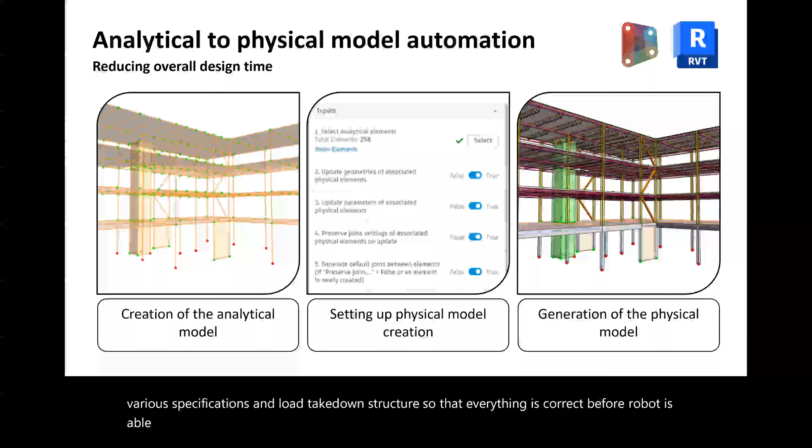So then lastly, if you are having a concrete structure, in terms of concrete design and concrete detailing, bar bending schedule, shop drawings, quantities, and all those will all be taken care of within your design. So structural detailing is made easier.

Traditionally, if you are to do this, you would be doing it in AutoCAD, where we know that there are a lot of changes. You can't track changes. You can't easily do changes. Every single change that is made, you'll have to manually do it in the entire project.

But in this case, with Revit and Robot, I just make a change on the 3D view, and then the corresponding elevations, sections, and other details that have been produced will automatically reflect and update as per the change that I've done. So basically, there's no single structure you can just do once; there will be variations and updates pending based on maybe meetings with the client and all that. So Revit makes that very, very easier for you.

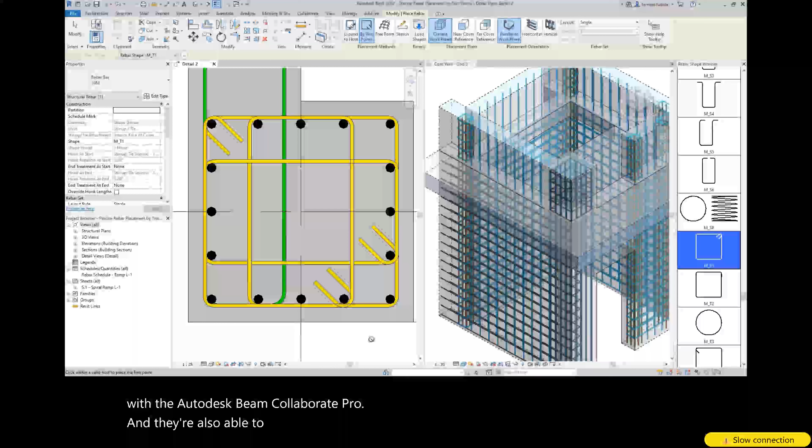You are able to track the changes with Autodesk BIM Collaborate Pro, and you're also able to easily communicate and have overall design variations and changes made easily within the overall project delivery team.

Okay, so then lastly will be that aspect of project sharing, which you've already said is through BIM Collaborate Pro and Autodesk Docs. There will be the aspect of collaboration, coordination, and communication that ensures things like design review and consumed packages are shared, and overall change visualizations will easily be made within the multidisciplinary team working on the project.

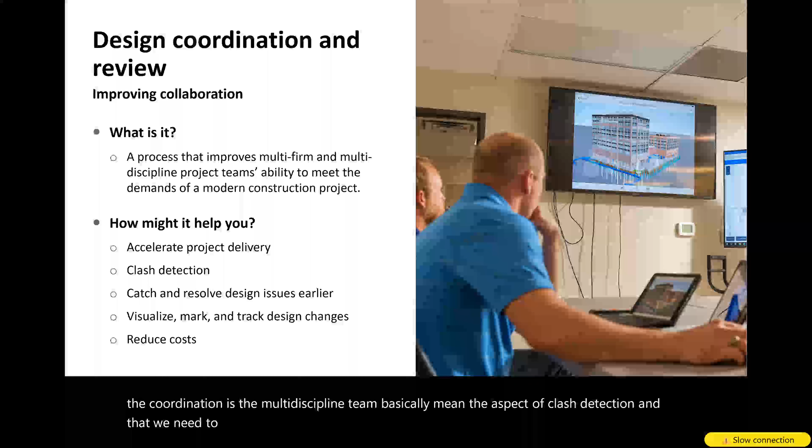So multidisciplinary basically means the aspect of mechanical, electrical, and architecture that you mentioned in the previous part. The coordination aspect, if the multidisciplinary team is involved, means clash detection, and therefore you need to visualize, mark, and track all those changes. This in the long run ensures you are reducing the cost of the project.

So then there'll be the aspect of detailing, which I think I've already mentioned, and also the clash-free model. Once you've run clash detection, you'll have a clash-free model which can easily be constructed, and that ensures there is no rework on site. The project can easily be delivered quickly. Then lastly, we'll now be quick to show something on mechanical as well.

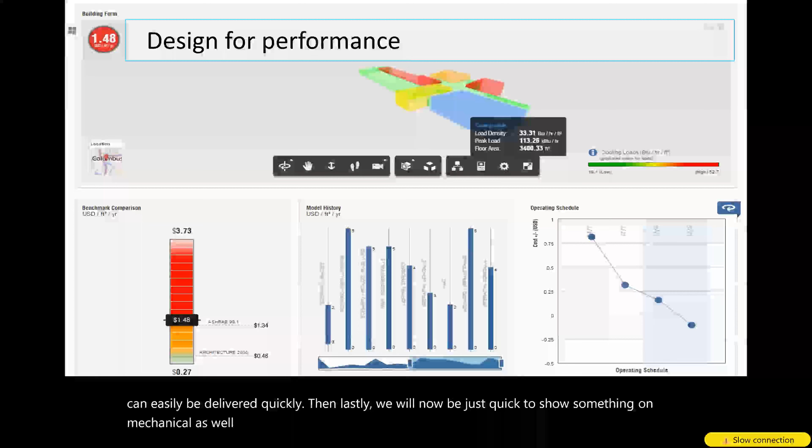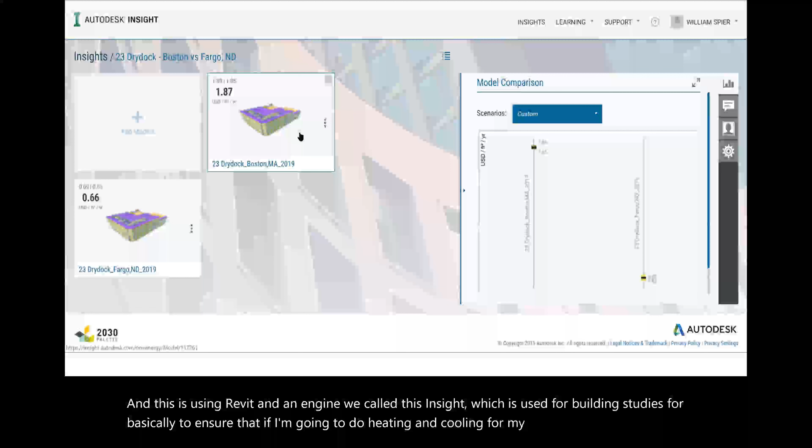So still using Revit, mechanical or building service teams are also able to do optimized building design while using leading simulation engines. They're also able to monitor performance and changes over the project. This is using Revit and an engine we call Autodesk Insight, used for building studies to ensure that if I'm going to do heating and cooling for my building, it should be based on a study and statistics. If I'm doing daylighting for the building or overall operational energy requirements, it should be based on a study, especially climate and weather for the specific location of the project.

But again, this will be guided by various benchmarks and studies, either as per ASHRAE, as I've mentioned, or as per the AIA 2030 commitment, which are all guiding principles and standards for sustainability and high-performing building design.

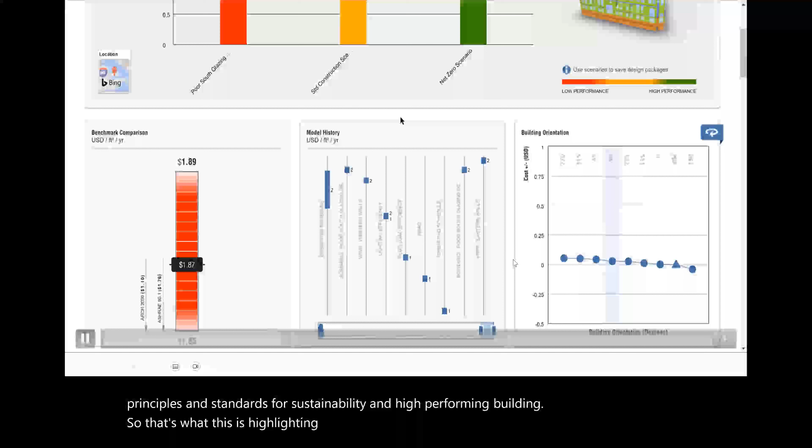Okay, so that's what this is highlighting, that you should look at the model history and the benchmark. The aim is by the time you're done with the design, it should be green. It should give you a green here. So you start off from somewhere, then make adjustments in terms of the method of heating the building, method of cooling the building, the lighting, how the architect has done the wall-to-window ratio for natural ventilation.

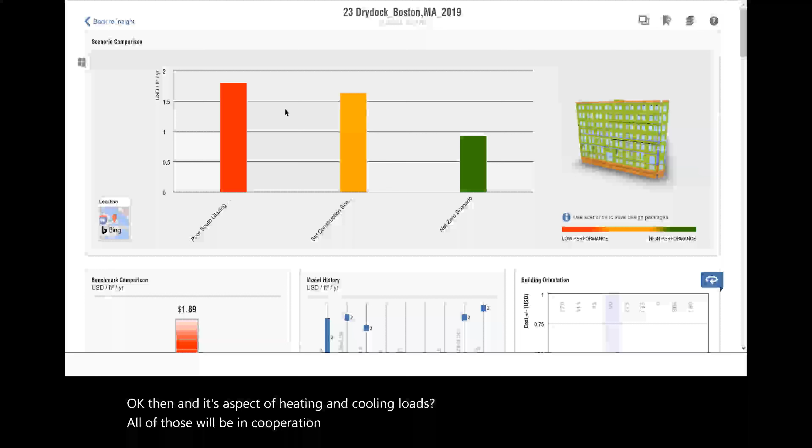Okay, then in the aspect of heating and cooling loads, all of those will be incorporated so that every specific change and variation I make should aim at lowering the energy consumption or energy use of that particular building in question. So once I've done all those parameters, it will produce a report that will guide me on how I should now go and size and do my things like HVAC - that's basically the heating, ventilation, and other ducts that you might have within the project.

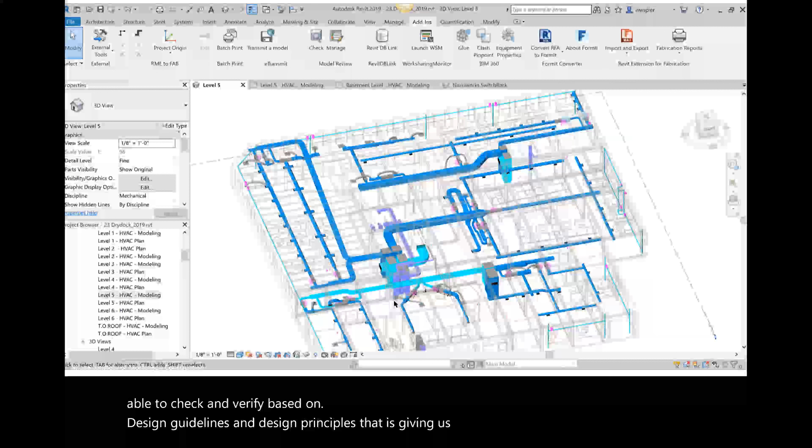So this basically ensures that you have that full detail or complete incorporation of all aspects of the building into one, so that we're able to check and verify based on design guidelines and design principles that give us correct output. Then the next part will just basically be to produce your quantities and fabrication components to ensure accuracy in terms of the output of the design we are highlighting.

So then there'll be an aspect of doing constructability checks as well for your MEP component, because there will be several components that are incorporated, and therefore to avoid clashes, the MEP or service team can also still run clash detection, just to ensure we are able to have an error-free model that will not result in any rework once we deploy the contractor on site.

Autodesk Revit enables what I was calling detailers to create coordinated fabrication models. So in terms of cutting, knowing the shapes and sizes of what to produce, so that we minimize wastage on site, is a very important aspect of the project as well.

So I think that's basically what I'd prepared to show. I don't want to show anything further, so I can allow for some questions and answers. That aspect of the building part, I said I would not show in detail, but the process remains exactly the same as what I'd shown on the infrastructure part. So maybe what I'll do is just allow for...